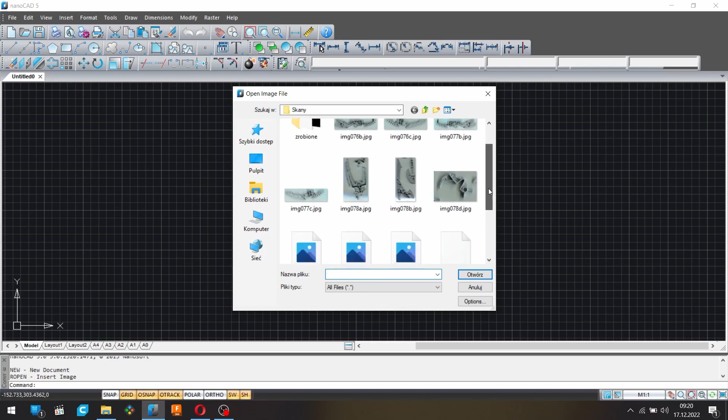Drawing 15. Okay. When I sketch on reference pictures, I like to change my line color to red, it's much better to see. Unless the part is red, of course, then you want something like bright green.

I make my reference pictures by scanning the parts flat. You could scan them in 3D, which is much more advanced and useful for bigger, more complicated parts, but for small parts like this, the flat 2D scan is perfectly fine.

But I also have the part itself in my hands, so I can rotate it, I can look how certain features look from the side, and I also have calipers that I'm going to use to take some dimensions that are hard to take from the reference itself, or dimensions that cannot be taken, like the third dimension, the width, because we have width and length, but we don't have height, so we'll have to check the height with the calipers on the real part.

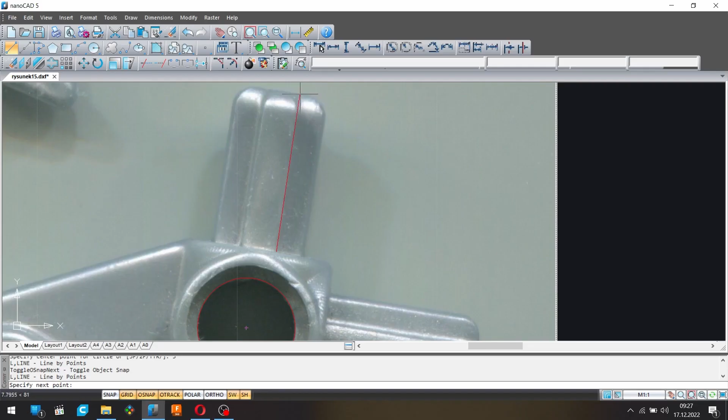Now we need to pick up the same angle that the connectors have. Again, we can use either of these lines, or even this line, but it's a lot shorter than this line, so we're going to choose one of these 4 parts. We could use this one, but because both parts are basically the same color, it will be harder to find the correct angle. So here is actually a much better place to do this, because the part with the background has much bigger contrast.

So again, we're going to zoom in, not too much, because if we zoom too much you can't see anything. And we're going to zoom just the right amount, pick the point on the line, and now we are not going to pick the other point because it's harder to again aim. We're going to go past the line and align those 2 parts so they're the same angle, and there we go.

So now this line will be our reference. Now we need to rotate this picture so this line is parallel to our grid lines. The way I like to do this, we're going to move it a little so we have space. I like to rotate the reference so the line is in the right upper quadrant. The angle here is not really important.

Now we make a horizontal line, we mirror our first line, and now if we rotate from this point, we can just grab this point, and now our first line is horizontal. We can rotate it by 90 degrees, so it's more convenient. Oh, come on, F8, there you go, and now our line is at a perfect angle.

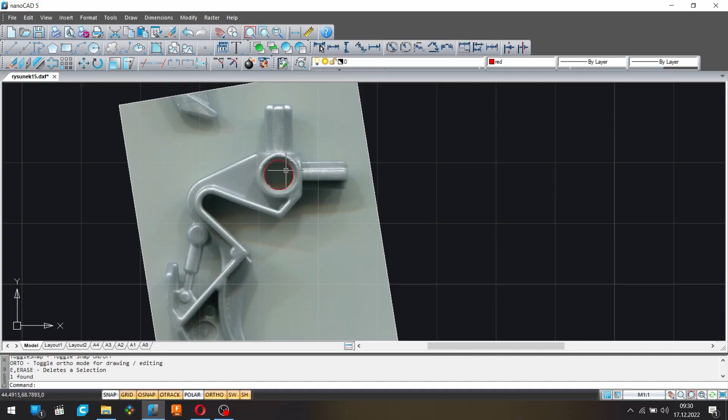There are 2 ways to do this: an easier one and a more accurate one. The easier one is to use the knowledge that the Lego connection points, whether they're Technic pinholes or big connectors, are on the grid. And the grid is 8 millimeters. The features on the grid are 8 millimeters apart.

So if we would have a part with 2 pinholes, not necessarily one next to another, but one here and one someplace else, you know that the distance between them is a multiplication of 8 millimeters. So you could find the center of those holes the same way we did for this one, measure them, count how many 8 millimeters should be between them, and scale the reference appropriately.

I find that it's not very accurate. Sometimes you could introduce error into this, especially if the pinholes are very close to one another. So actually the better way is to find the longest distance on the part that you can, draw it, see how long it is, and then measure the actual part with your calipers and use this measurement to scale the part.

It's much more accurate, and I like to do it this way.

Alright, so I'm looking at my part. Sorry, I don't have the camera on the part. You can see what I'm doing with my hands, but the stream was very last minute.

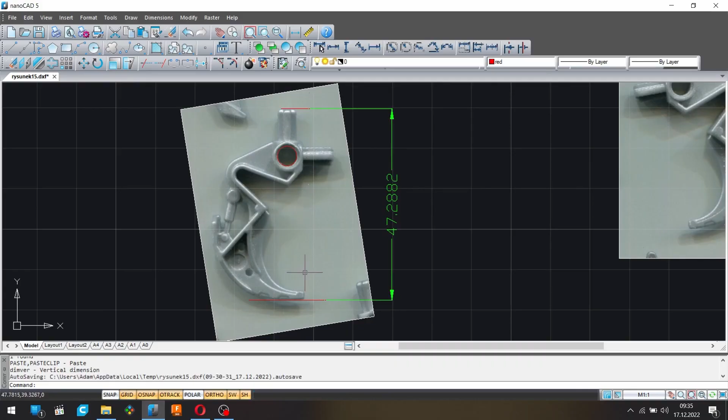And I found by doing this many times on many different reference scans that my scanner scans the parts almost perfectly, almost to one-to-one scale. But if I double check and correct it a little bit, the parts will only be better for that. So now I'm going to use my two dimensions, the physical one and this one, to scale this reference image to the perfect one-to-one scale.

So I'm going to use a calculator. I'm going to put the dimension I want first, so it's 47.04, divided by the dimension I have, 47.2882. And this is our scale factor that we need to scale it to. I'm not going to write this, I'm going to copy it.

I'm going to scale this whole group. Scale, specify scale factor — we need to change to a comma, and there we go. You can see that now the length is the perfect 47.04 that we measured from the part.

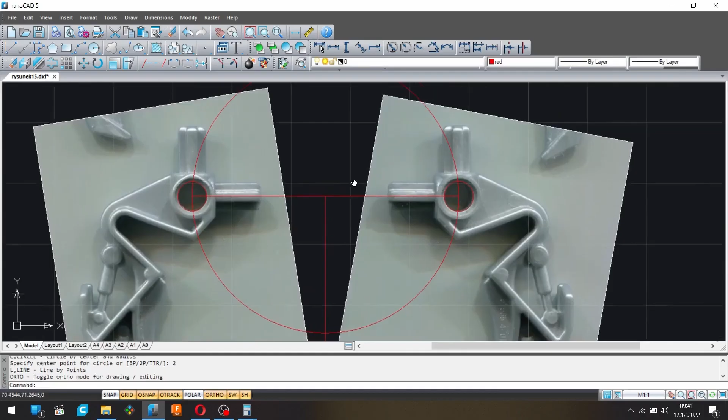Okay, we will just have to add a mirror line between them, right in the center. And we don't need anything on this reference because we'll be first working on this side, then flip it and only adjust the differences.

Okay, so now we will use our center of a circle, but we won't be using our circle because it's some weird dimension that we don't know and is probably not accurate. We're going to use our dimensions of the Lego pinhole that we know, and those are 3 circles. I'm going by diameters, so it's 4.95, dimension 6.3 diameter, and the last one is diameter 7.4.

We don't need our line, and you can see that the part is scaled very well. We can trust our dimensions of this reference, and we can now start drawing the shape of the part.

We will be using NanoCAD to draw the flat reference, and then we're going to import it to Fusion 360 and add our third dimension there. We're going to 3D model our part, and you could actually skip NanoCAD and do this whole thing in Fusion — import the reference pictures there, draw the reference there, and do everything in one program. The reason I do it this way, there are actually two reasons.

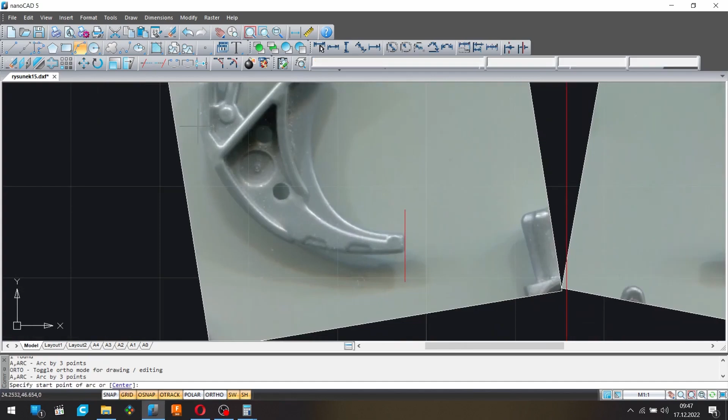So we will have to do it like this. We'll have to... almost the same length, this one is a little bit longer. It goes to this point here.

Okay, we need three points to pick up the arc, and the farther they are spread apart, the more accurate the arc will be. So we'll start here. Here's one, here's the second one.

And now again we could use the point, but you can see that the difference right in this region can get pretty big pretty fast. So rather than specifying a point, I'm going to go past the end of the arc and, looking at this region and this region, find a best way to click so the arc is as tangent as we can to the entire length. Okay, here we go.

Those lines will cross here, so we can extend it. Now we will use the center of this arc to pick up this smaller arc, because those two arcs, while having a different radius, are concentrical.

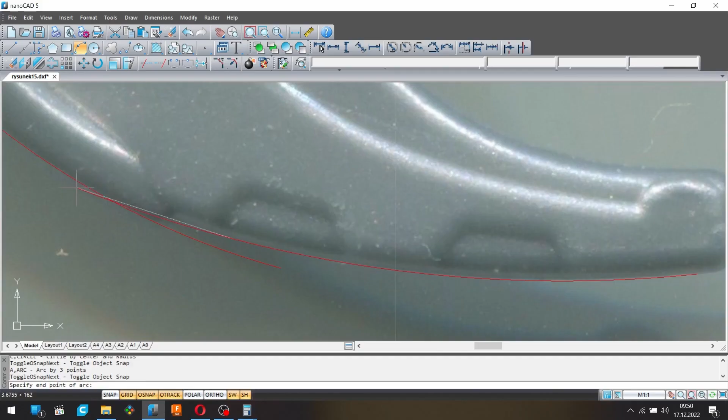We'll just draw this arc separately. There we go. How does it look? Okay, it's just a point.

We can actually pick up the center of the arc and just divide them like so. Now we can trim away all the excess. We don't need this, we don't need this. There's our nice point.

We'll come back, or maybe, no, maybe let's do them now. How to do this?

Okay, AutoCAD, which I was using before, had this nice feature where you could use offset. You could pick the line, and maybe I can't here. See? No, you can't. In AutoCAD you could use a line to offset and not put in the dimension, just visually lock it in place.

In NanoCAD you have to know the dimension first. Unfortunately, it's very inconvenient. So we're going to measure the distance between this line and this line. It's kind of a hacky way, but you have to work with the program on its own terms.

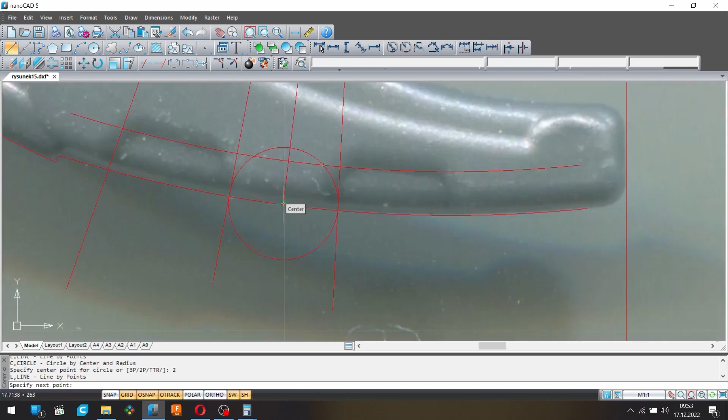There we go, there's our center line, mirror line basically. We're going to mirror this line. Now we can be certain, I can actually prove it to you.

Here we have, oh, it's not very accurate, I would have to change the accuracy, but we have around 9 degrees, and here is the same. So we now don't need this line at all. We can trim away all the excess.

Now we'll just have to round off these edges. Another feature that was very useful in AutoCAD for this, and isn't working here, or I don't know how to do this in this program, is you could draw a circle that was tangent to three lines.

So what I would do here normally with this corner, I would just draw a third line that's also tangent to this rounded corner, and then I would just use those three lines to make a perfect rounded corner that matches the reference.

You can't do this in this program. The only way is you can use two tangential lines, and for the third dimension you have to specify radius. So it's not very convenient, it's not very accurate, but the other way to do this is use a three-point circle.

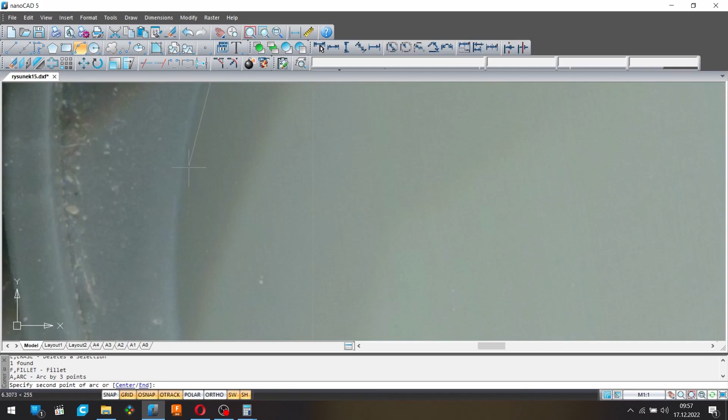I use a few arcs to approximate the same curvature. So we know that one arc starts here. There are definitely at least 2 arcs, maybe more. It will turn out as we draw, but they join somewhere here. We don't know where exactly, but we know that our first arc is still going here. Now we can see that if we made our line tangent, at some point it just drops off because here the curvature changes. We can now do the same thing from the other side. And again it drops off.

We can approximate this curvature with two arcs. Sometimes the shape is more complex, the arc might change more drastically, or there are some other geometries involved, but here we are fine with just two arcs.

But now the challenge is to make them tangential. Again, in AutoCAD it was very easy to do. I won't bore you with the details, but here we have to again do a little bit of a hack job, unfortunately.

Let's find the center. Here we go. .1. Now let's do TTR. So tangent, and our radius was 8.1, and you can see now that those two, the arc and the circle, are perfectly tangential. So again, trim off the excess, and we made this beautiful curve with two arcs that are perfectly tangential.

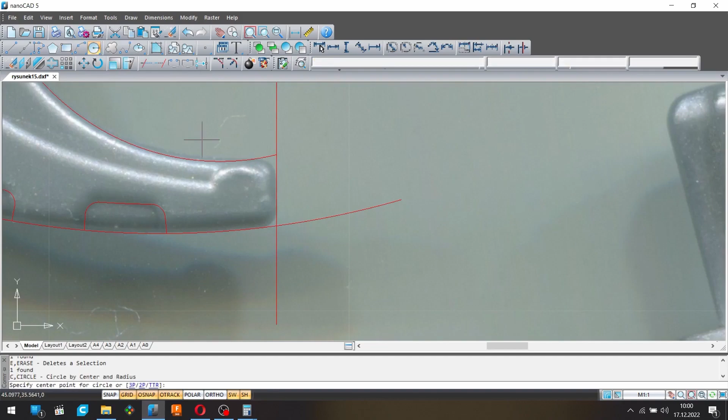We need to round off these corners. Again, we will measure them with a 3-point circle. .7. There we go.

We have another tooth here, this little step, but those two lines, the bigger one right here, and the little one right here, are parallel. So we can actually find out the angle first from the bigger one. We can now use this as a reference. There we go.

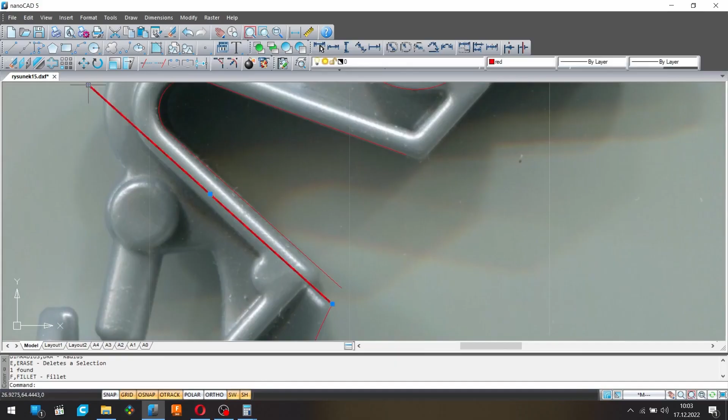1.55. I'm going to shorten this line so we don't mistake the data for this line. This is something different, so let's just leave it here for now. Okay, now we can make this corner around here.

Wait, actually, give me one more minute. Oh, there we go. I put on some music, but I have to use my headphones, so you can't hear it, and Instagram won't flag me for the copyrighted music.

Okay, now we can continue. Those lines. Oh no, I can't hear myself think with the music. I wouldn't be able to comment. So no music for me, but turn on music you like to accompany the stream. We would have music if Instagram would be a little more tolerant.

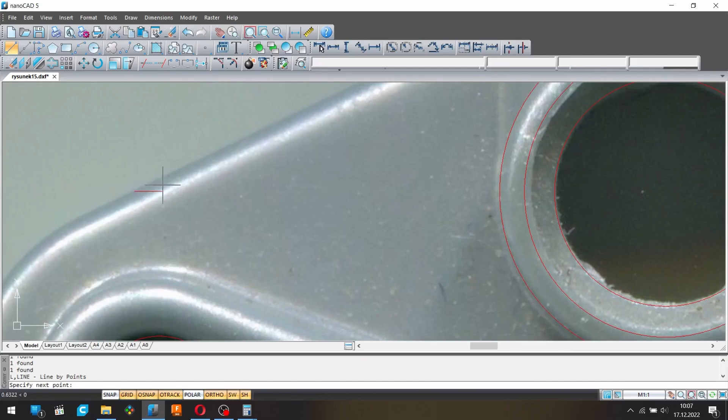Are those two circles concentrical? Yes, they are. So we can use this. Oh no, we will have a problem with this being tangent to this line. Ah, damn it.

Damn you, NanoCAD. Why don't you have so many cool options that AutoCAD has? How to do this?

I think I'll have to go the other way with it. I'll have to start with the circle and now do this line again.

Oh wait, since we have the angle, we can construct our tangencity. What's the action that comes from the word tangent?

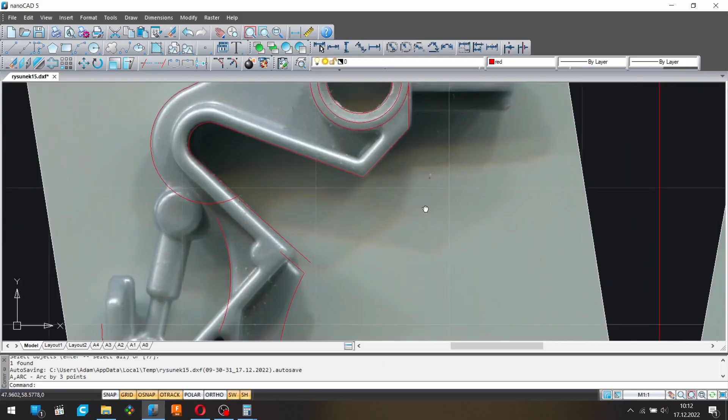So when you have a big part, try to avoid skipping certain places. It will come up eventually when you import the sketch to 3D modeling software and you have gaps. You don't have closed profiles, you can't extrude from them, and it will be clear where you skipped something and where you need to come back and redo it.

But you'd have to open the sketching software again, redo this, import the sketch again to the program. It's just a pain in the ass. So if you skip it, be sure that you remember to come back to it.

There we go. The circle seems to have its center on the crossing between those two lines, and I don't have this line yet, so I can draw it. Also, I can make up this corner because we would need another line here. So I was trying to... oh, I'm making so many skips.

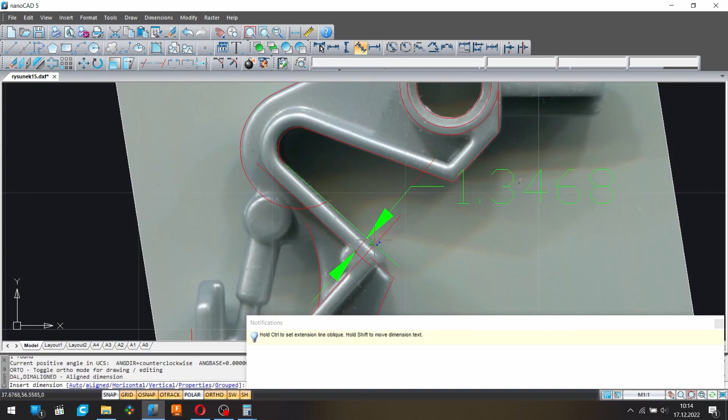1.35 is the dimension. We use the offset command. 1.35, and now we can go crazy with the offsetting. This offsets to here, this to here, this to here, this to here, this to here, this to here. Yeah, it's the same offset, so we can do this now also.

I think that's everything. Now let's patch all the connections. Don't need this, don't need this. This. Now we have our nice corner. We'll come back to round it off in a minute.

Everything's okay here. Trim this. We'll round this off in a minute. Okay, seems everything is fine. Now we can do this circle. Go.

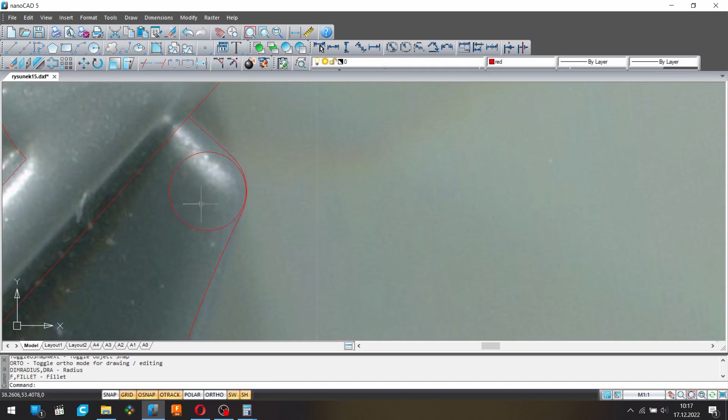Let's say about here. 0.56. How was it here? 0.7. Will 0.7 work here to keep it consistent? Let's see how 0.7 looks. Yeah, kind of. Looks okay, we can use 0.7.

Okay. Going on the same path. Here we go. Here we go.

There, maybe we'll have to see in the 3D phase if it's even possible. I won't be rounding off the internal corners, I'll just leave them as they are here. The only one we have to absolutely do is this one, so the lines connect.

Again, I was trying to do the AutoCAD thing, draw a third line and define the circle with 3 tangential lines. You can do this. Let's measure this corner with 3 points.

About here. 0.3. Let's cut this off here.

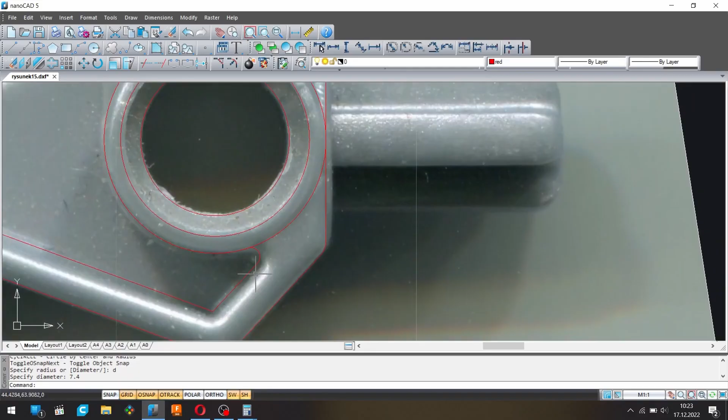This corner is fine. Everything is fine. I'll try to remember that from this line up everything is already finished, so I won't be going back there to even check.

Okay, maybe let's tackle this piston now. Pistons are very fun to make on the Bionicle parts, as long as you have prepared a certain approach to them. I like to do it in this way.

First, I pick up the two hinges. This one. This one. And the line between the two centers. Come on. Here we go. Center is our axis of both of those two cylinders, and we also picked up the angle.

Of the sides, so we can use this line to pick up the diameter of both cylinders, the bigger one and the smaller one. There we go. But you might suspect that the distance from this line to the center and this line to the center probably isn't the same, and you can actually even see it that this dimension is much more bigger than this one.

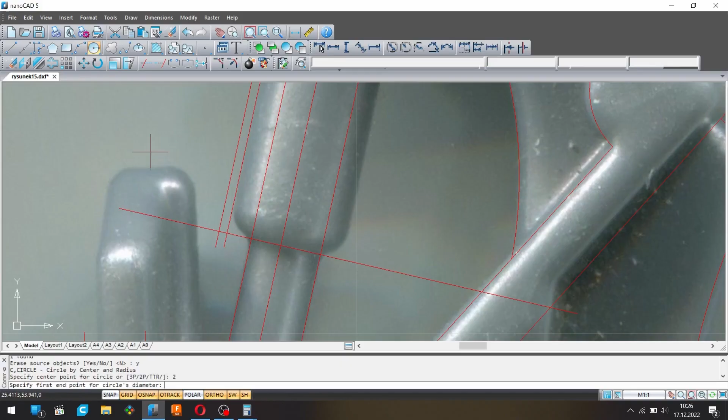The one from this side disappeared. It's this one here. Now you can see that there's a difference between them. So if we moved this line to this line, then we would have the same gap on this side. So to kind of make both of the sides happy, we'll find a line that's between them.

Let's use this one. We don't need this. And now the line is not as accurate to this side, but if we mirror it back to the right side, you can see that the gap we have here, we also have here. So both lines are the same distance from the best lines they could be.

And now we can revolve it and do a cylinder out of this profile, and it will be the closest we can pick up to the original size. So now we'll do the same thing with the smaller diameter. Again, let's do it a little quicker.

There we go. Now we can get rid of this excess. Just move this here to be sure that we don't leave some random lines and geometry on the line there. Okay, let's extend this.

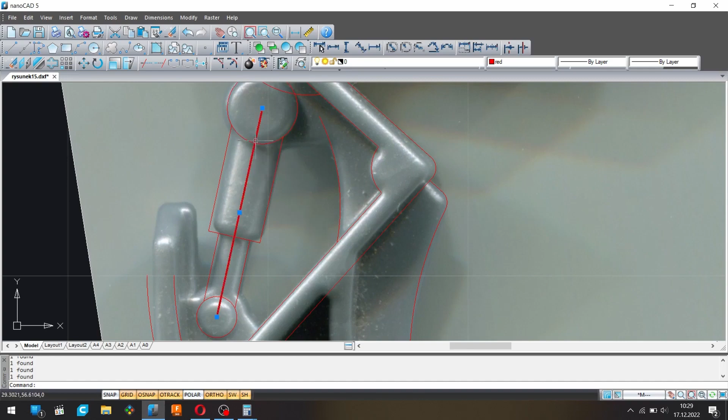I like to leave the center line because we will actually need it in the 3D phase to revolve half of this profile to make a cylinder out of it. So I'm not going to get rid of that. I'm going to extend it so we can use it later.

This is actually unusual. On other Bionicle parts we would be done, but this one has this fillet right here. Not sure why, but let's model it how it is, because we are making a recreation. We are not allowed to make decisions about the way this part looks. It might be stupid, but we're doing it the same way someone did it before.

Okay, that was a little harsh. It's not stupid, I would just do it a different way. Not sure what the reason was here, but it's not stupid. There might actually be a very good reason and I just don't know it. Let's trim the excess.

Mirror that. Get rid of the excess. There we go, that looks pretty great.

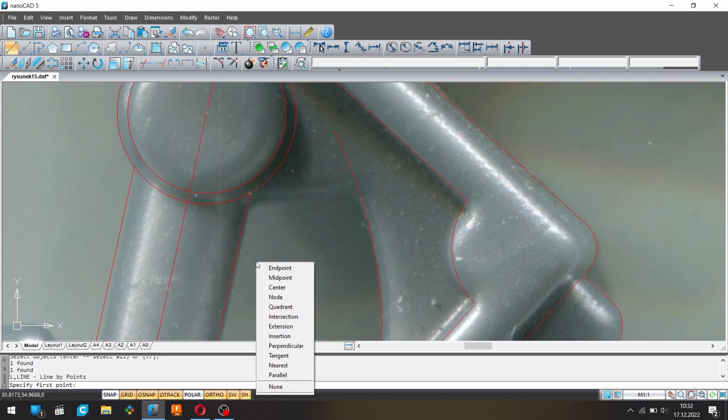I hate to be a broken record, but in AutoCAD you would do Control Shift right, choose tangent, pick up the circle, and you could have a perfectly tangent line to the circle, but I have no idea why it doesn't work in this NanoCAD. Maybe it's available in the paid version. I'm using the free version, but I have no idea why the menu is here, but if you use it, nothing happens, not even a command shows up here. No idea.

So let's do the same trick we did earlier. Let's pick up the angle, make a line that's perpendicular, move this to the circle, there we go. Now this will intersect here. Don't need this. There we go. Trim off the excess.

How does it work here? Maybe like that. This is the same thing we had with those cylinders intersecting here. It will actually turn one way or another in the 3D modeling phase, so I'm not really concerned how this corner looks, because when I extrude this plane and revolve this cylinder, they will meet one way or the other, so it doesn't really matter to me.

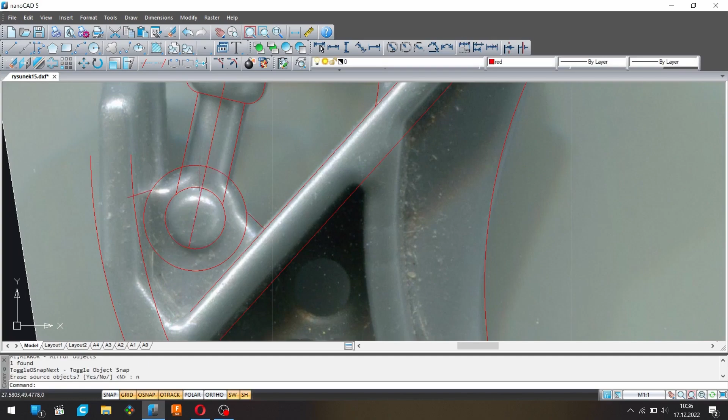And actually this looks to be mirrored from the rotation axis of the cylinder. Let's try if this will work. Kind of, oh, not really. It's perpendicular to this line that we don't have here.

Let's get rid of that for now. How to do this? Okay, let's do this corner. Wait. The arc here comes in contact with a straight line, but I look at the part, and they don't seem to be tangential. So this is actually more convenient for us. This little face seems to be vertical, so we can just use a vertical line. There we go.

They intersect, we have this little sharp corner here, not tangent. And this kind of angle here, this deviation from the line, is actually a distortion caused by the difference in thickness from here to here, and the part actually doesn't slope off like that. It's all one face, I'm looking at the physical part, and that's how I know.

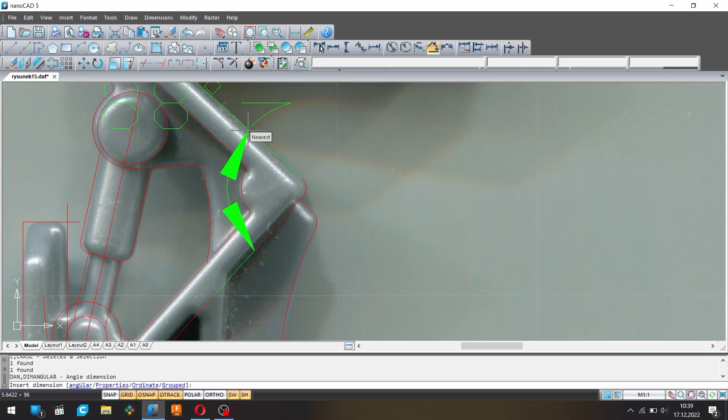Let's assume this, and we can actually add those two lines, supposed to be perpendicular. Not really, it just looks like that. If we actually make 90 degrees here, it will not be very accurate, it would cause error. But also, wait a minute, those two lines, they should be...

Oh man, I missed this, I'll have to redo this in a second. But let's finish this first. What was the offset? God damn it.

1.3, maybe 1.35, yeah I think it was 1.35. Offset 1.35, we could have checked in our command history. God damn it, what a waste of time. This is basically what we needed to do. God damn it.

That's how you pay for crappy memory. And the edge here was what exactly? 0.7, I thought 0.3, but the 0.3 was from the inside. 0.7. Here to here, here to here. There we go.

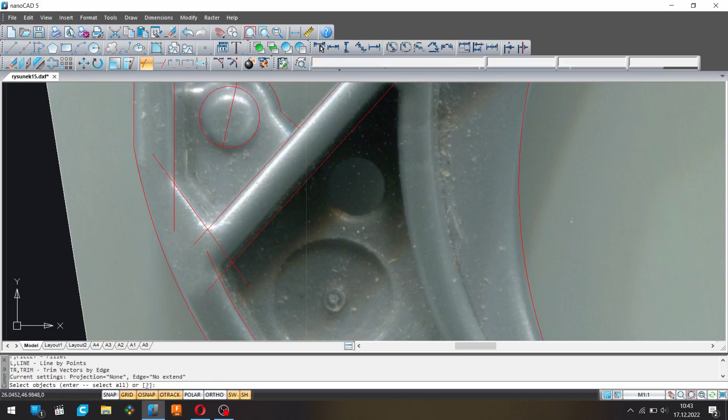I can show you how the extend works. The trim works like it deletes the rest of the line to the next point where it crosses with something. So the cutoff works like this, and the extend, it's easy to imagine, works exactly the opposite way. It extends to the next feature.

So basically we can do this, or we can extend it past the point and trim. It doesn't really matter, works the same way. Okay, so now let's round off the corners.

0.3. This one definitely yes. This one, let's leave it. Let's leave it like it is. This one yes.

Okay, that looks nice. What's the connection here? I think it will turn out in 3D. Let's just do something like that to close off that loop, this profile.

I'm not sure it will look like that. The third dimension will dictate the actual shape. Okay, is this all done? I think so. Let me look at the part.

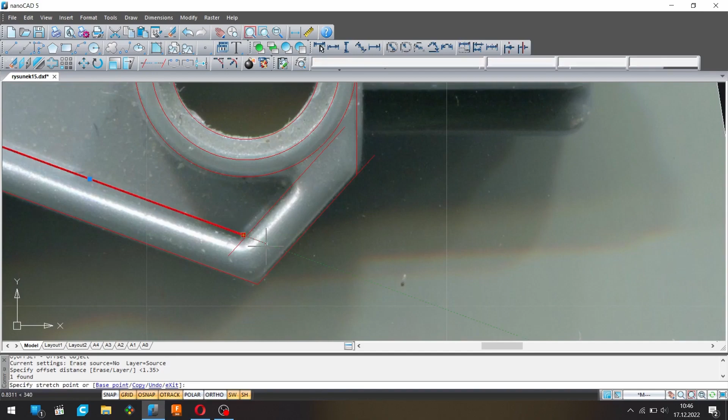And the offset was 1.35. This to here. Okay, and the inside radius was 0.3. Oh, it didn't cut off.

Worked fine. Maybe no, should cut off the rest. Yeah, that's what I was talking about earlier. The fillet command sometimes has some problems. I'm not sure what they are caused by and how to get around them. I don't know how to work with it sometimes.

Okay, that wasn't so bad. Nice. So this little section is everything that's left. Let's pick up these 3 circles.

This one will dictate our diameter and our center of the circle, but this one will only dictate the center, and to have uniform... well, actually, let's redo this one too.

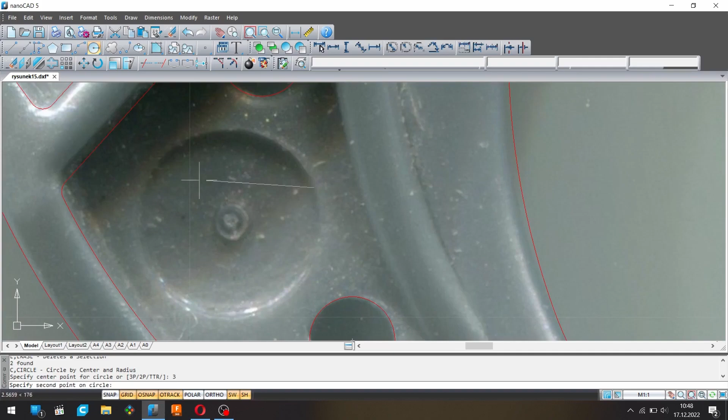The actual possibility is that the guy who first designed this didn't make those holes either 1.89 or 1.9, but like 2 millimeters. Now I'm picking it up with an error after the ABS shrunk in the mold. It's not extremely accurate. I'm not redoing the exact thing that the Lego designer did so many years ago, but you know, it's reverse engineering. You have to expect this kind of inaccuracy and just work with it.

For features that need much better precision, like connection points, pinholes, axles, you would have to work out the perfect dimension the other way. You could measure it with calipers, 3D print it and prototype it, and check the fit with other parts. You would have to be much more precise here, but when we just pick up the outside curves of some blade or some holes that aren't even connection holes, it doesn't really matter if they are 1.89 or 1.9, it doesn't make a difference.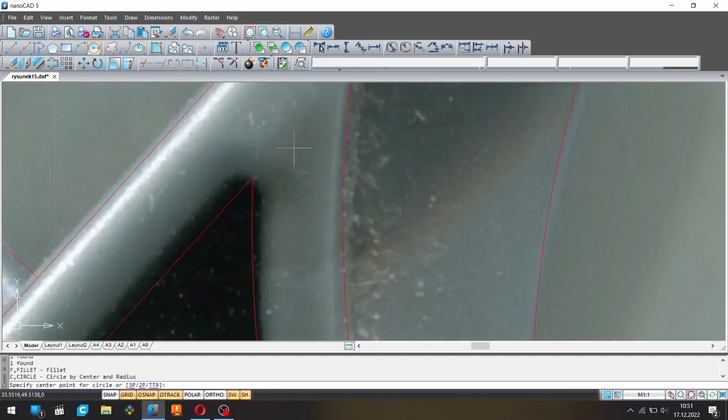It doesn't look like 0.3. Yeah, something's wrong here. But this might be 0.3. Yes, this one is. But this one, I also have the error here. As you can see, there's a gap. Let's measure the radius here. .35. So actually 0.3 should work.

How does the 0.3 look again? Let's leave it. Doesn't really matter. The center of the circle. Here we go. Down here.

Again, just to close off the loop, the profile. Okay. Let's see, we have this line here. And are they related in any way? No, doesn't look like it.

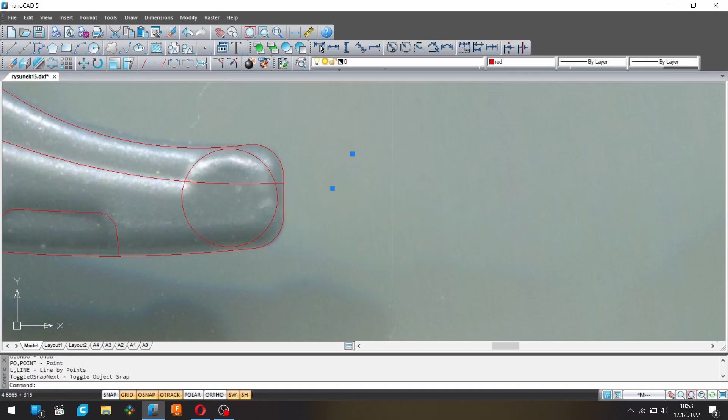What's this, is it point? Point, what does a point do? Oh, you can pick it. No, you can... what? Never mind, how to do this?

It doesn't really need to be tangent to this one or this one, but it absolutely has to be tangent with this one. Oh, I know how to do this. It will be another hack job, but I've lost count of the hack jobs we did today, so it doesn't really make a difference anymore. There we go. Good enough.

Let's check that we didn't miss anything. Everything looks fine here. Everything looks fine. Alright, so we have... I didn't save for this entire time, god damn it. Thank god that it didn't crash, we would lose all this work.

Okay, this side is done, now we can mirror it to the other side. Let's just recheck, everything here looks the same.

I will not be modeling the artifacts left after the injection molding, especially since they can differ through different parts. Not only could you have different molds and the artifacts would be in different places, even from the same mold the artifacts could sometimes show and other times not. They could be once above the surface, then below the surface, so it's really a waste of time to model all those molding artifacts, because you will always get them wrong no matter what you do, so it's best just to skip them entirely.

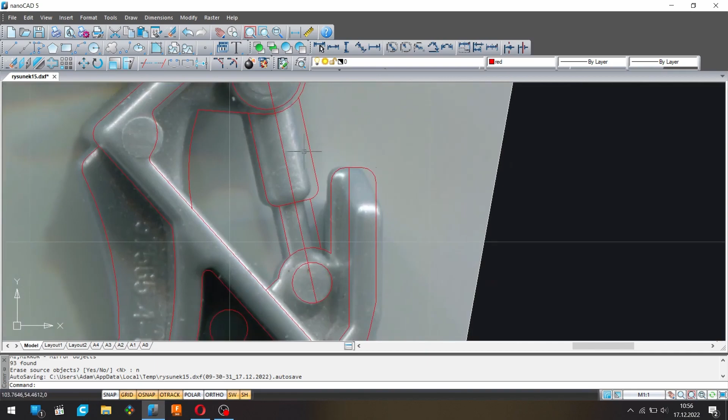Let's not care about this one, everything looks okay here. I will not be modeling the copyright logo or the part number. I don't need it for anything, so the only difference is this diameter.

Okay, don't need this. Trim here, here, here, here. This looks fine. Okay, so we are done.

Now we can import those flat references to Fusion and do our third dimension, and 3D model the part.

Okay, so now with the sketch in NanoCAD done, we redo from references both sides of the piece, we can now import those lines to a 3D modeling program. I'm using Fusion 360, and we can use the sketch we made to 3D model the part with some volume to it.

So first we're going to start by inserting the sketch we already did. I didn't use the plane. Okay, here we go. Now everything is okay. There we go.

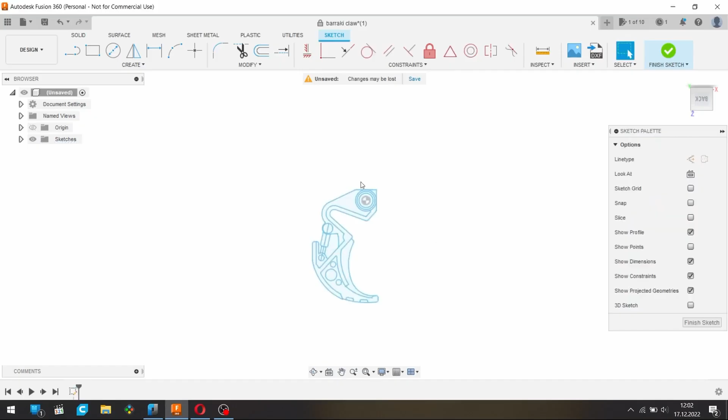Oh man, I hit escape again. Point to point. Okay, and now this half of our part is in the correct place. We can finish our sketch. I'm going to rename it to more easily find it later. I'm going to name it front.

Now we need the other half. So again, the DXF, select, okay. Now we need the... wait, let me see. Okay, we need this one. So we can delete this one.

We need to mirror the line. Okay. And we can move it so they are in the same place, point to point. Okay, now you can see we have both sketches in the same place.

This is the identifying feature, the circle that's on one side smaller, on the other side bigger. So we can see both sketches because they are transparent. We can save.

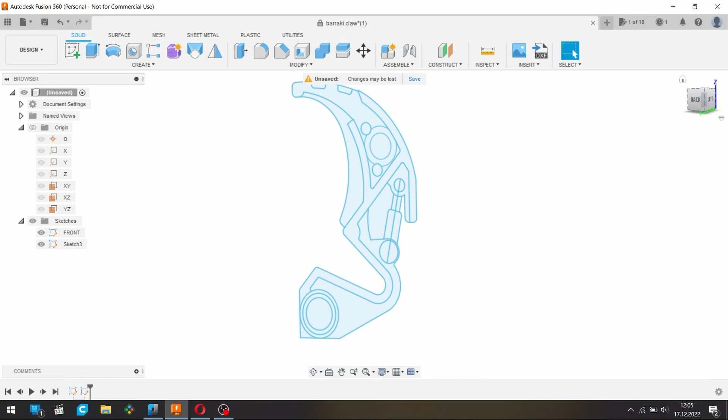This feature here that's going to be extruded from this arc is tapered down. So this entire profile is at the set height, but this little appendage goes down to this plane. The best way is to do this appendage first, because if I start with this plane and then cut off the slope of this part or model it in some other way, I'm going to have to watch out for the planes we already made, to not cut them or modify them.

So my general approach to this kind of thing is to do the most complex, most difficult geometry first, and then you can slowly add the easier stuff. So I'm going to start with this appendage, and first let me look at it. What operation would I like to use?

If this appendage was straight, if it wasn't on an arc, it would be very easy, because I could extrude this profile to the desired height, and then tilt this face down. The problem is that it's at an angle, so if I do this, it won't work the way I want it to.

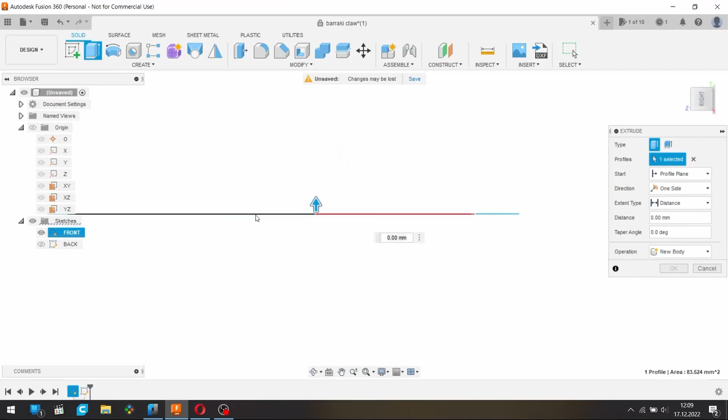I like to position the plane that I'm extruding from in the middle of the part. You could position it on one side and work from one side to the other, but the problem is that there are many features in the middle. If you did it that way, you would always have to go from one side to the other, and then move the feature you started so it's symmetrical on both sides.

The better way to do this is to work from inside out. So you know that the features you make are always in the middle and always symmetrical. Also, the dimension we need from here to here is much easier to check with calipers than the dimension you would need from the center to the edge. So that's just a natural way to do this.

I'm going to use my calipers now to check what size, what width this part is, and it says 7.38, so it's probably 7.5. We can round it off, and now we have some starting geometry.

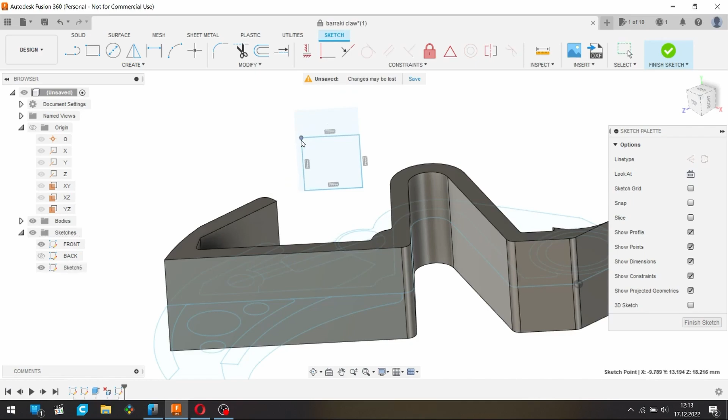Like I mentioned earlier, there are situations where you might actually want this, but if you have a picture and you want to draw on the picture to recreate the shape, then this situation is very annoying to deal with.

So to lock this in place, I would have to put a dimension here, I would have to put 2 dimensions here, and you can see that the rectangle now can't change shape, but it can still move. So now I have to, for example, put a dimension here. Now it can move only up and down. I have to put a dimension here. And now after 4 dimensions, it's finally locked in place and I can't move it. So it's a really big problem and a pain in the ass to work with. So when I create a sketch I'm going to model from, I like to do it in drawing software, so it's much more convenient.

Okay, now we can get back to the job at hand. I have my rectangle. I know it from the physical part. I can see how the shape looks. I can see that the sides of this appendage will be flush with the sides of this extrusion I already made. You can see that I can't move the rectangle up and down, but now I can move it side to side.

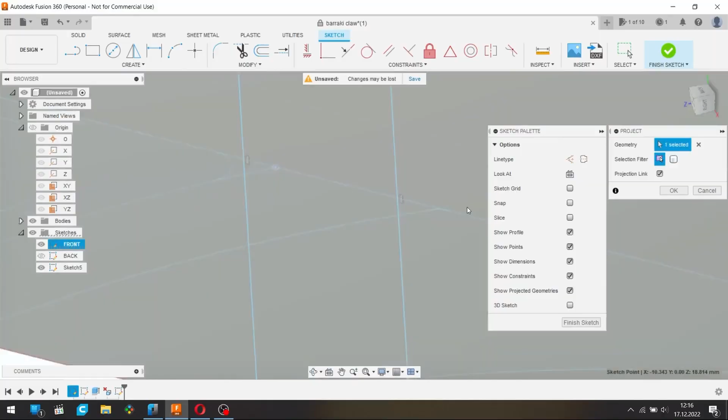So we finish the sketch, we get back to our sketch. And now, if I hide the earlier sketch, you can see that we don't actually have anything that we can use. We have only this one sketch, this one rectangle. So to use the geometry from the previous sketch, we're going to make it visible, and we're going to use the command project. We want this point from this earlier sketch and this point from this earlier sketch to appear in our newer sketch. Now you can see that even if I hide the previous sketch, the points are still here.

And now we can say that this line is going to be on this point and this line is going to be on this point. With the sketch turning black, it means that everything is constrained. I can't move it, I can't rotate it. It's basically as you want it to be. In general, you want to constrain all your sketches, so you can't accidentally move something by accident.

But again, there are instances where it's more beneficial to leave the geometry unconstrained, especially if you are fine-tuning something and you want to see how the geometry will look with this sketch, and then you want to change it a little and see the difference. So you always want to choose the best way to constrain your sketches for the task at hand.

This is one end of this appendage, and now we need another end right here. So we are going to finish the sketch, this rectangle we drew. We are going to leave it for now, and we need to do something similar here on this line. We could create an extrusion from this profile and create a similar wall to this, but it's not really necessary, and like I said before, this might cause problems later.

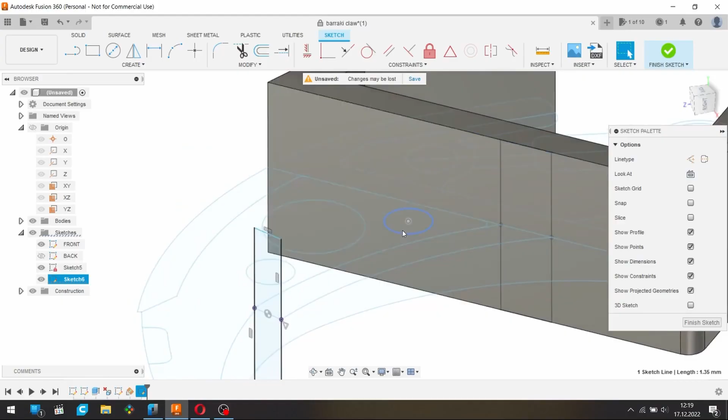It's not necessary, you can do this in other ways. For example, you could add a dimension to this rectangle, and say that the distance from this side to the center, well, let's delete this constraint, and now I can set the top side to the center equals this, whatever it is. I can change this, and it will update, divided by 2. So if I change it to 8, you can see this changed to 4.

So it's always in the middle. You can enter more complex equations here. I could add 1, I could divide it by some other dimension. So it's really helpful, you don't have to do the math yourself. You can just say that this thing has to be, for example, 7 times bigger than this thing, or this thing has to have a relation to the other thing as this to this. It's really helpful, not really needed here, so we can do just the midpoint.

Okay, so now I'm going to look at the part, and I see that this side of this appendage needs to be flush with this profile. I don't have this profile yet, but I can already measure what it will be, and it will be 1.41. So we are going to put 1.4, and we know that this sketch, this plane, when we eventually make it, will be the same width as this appendage.

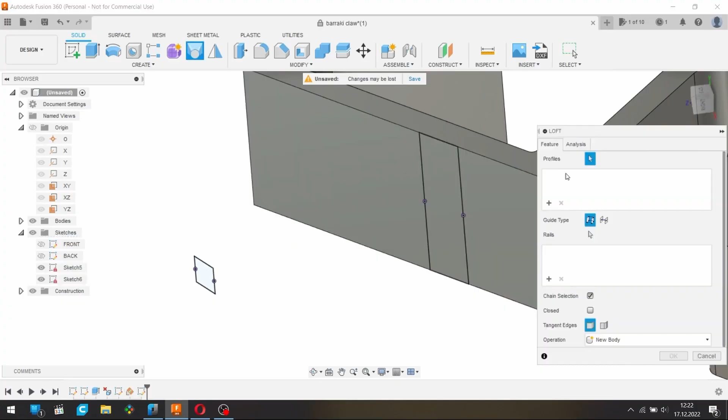Now we could use the command loft, but it's not going to have the shape we want. I'm actually going to use it and show you what it will look like. We want to choose our profiles, which we already have. So we add the plus, we want this profile, we want also this profile, and you can see there is a shape that appeared between those two profiles we made.

But if we go to the... let me just set this up, wait a minute, I'm going to set this at home, fit to view. Okay, now we can see that the end of this feature and the beginning of this feature are in the correct place, but the shape of this feature isn't as we want it to be.

We want it to go at those arcs, but it goes straight. We could add another profile here in the middle, and it would be a little closer to the arc, because it would go from this one end to the middle and then to the end, but it still wouldn't work the way we want. It wouldn't go at those arcs.

So to fix this, in the loft command, we can add something called rails. So the entire command would say: start at this profile 1, and at profile 2 right here, but don't go straight from 1 to the second—also use the tracks, the shape of the path that we want to go from one place to the other. So we are going to add those rails, and then the shape will have the desired result.

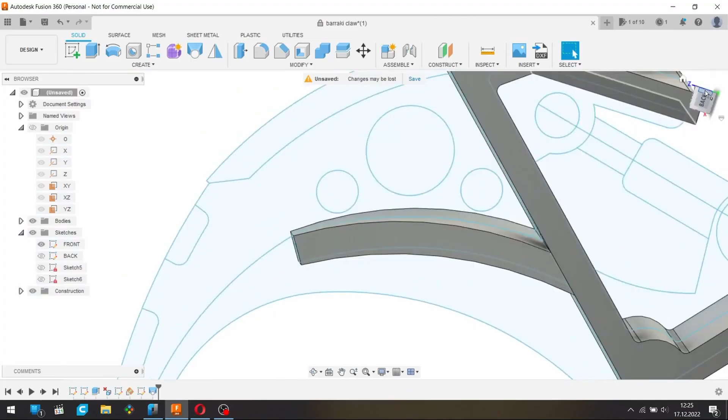So how to do this? One way is to add those rails here in the middle. Actually, I'm curious how it will look, if it will even generate. Here to here. Add those rails, one here, one here. Let's see how it looks. Well, it's actually not bad.

What I wanted to do is make 4 rails for each of the corners—one here, one here, one here, and one at the 4th corner. But because the shape is pretty uniform and the transition isn't very complicated, I don't think we actually need to do this. I think we can leave this as is. So we actually managed to make a little skip and save ourselves some trouble, so we can move along with the part. This worked out the way we wanted it.

And now basically the same story is with this appendage. This appendage is a little different because it meets this plane, which we still don't have yet, at a different angle. So we will have to take that into account and remember that it actually goes to here—it doesn't just finish here, but basically it's the same story. So instead of commenting, I'm going to go quickly through it, because you already know what the problem here is and how I'm going to solve it.

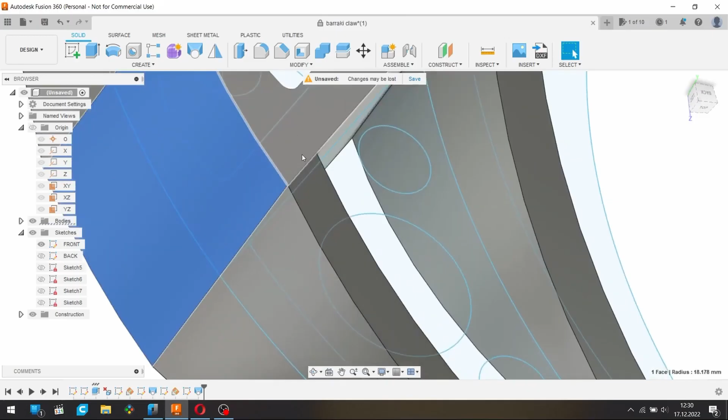Okay, looks good. Now you can see, if you remember how I do it, this entire arc is one arc, so it would be nice if this face would also be basically the same, that we wouldn't have two faces. To fix this thing that happened here, we can choose this face and delete it, and the program will use the faces around it to generate a filling face. So it deletes this one face that was here and fills the hole that is left, using the other faces around it and figuring out how this face should look.

So this works very nicely. We have the shape we wanted. We have one smooth face here. We can continue. I'll export. Let me look at the part, what we have next.

We can do the piston next. We could actually already do the easy parts, but since we are doing a little bit more complex things, we can use the piston because it's not really difficult, but it's a fun process, so it will be fun to see.

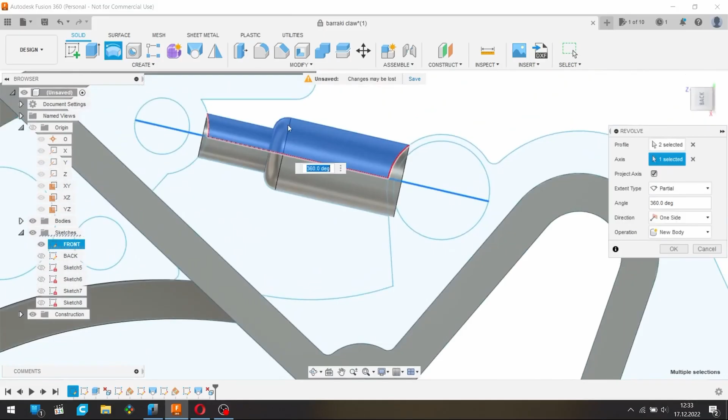So we want to revolve this profile around this axis, and you can see that we have a nice cylinder that also lines up perfectly to both sides because of the splitting difference we did back when we were drawing. You can also see that there is a concave shape right here because of the way the piston meets with the other geometry on our sketch. We could leave it like that and then try to patch it, but it might be difficult if it gets covered with other bodies, so the best way is to deal with it now.

And we can do it by squaring off this end and also squaring off this end. Now we can edit our feature and add that we want this revolved too. And you can see that the concave - convex, I still don't know - the hole that was here disappeared. So we can do this to this side too, and it will be easier to merge with the other geometry later.

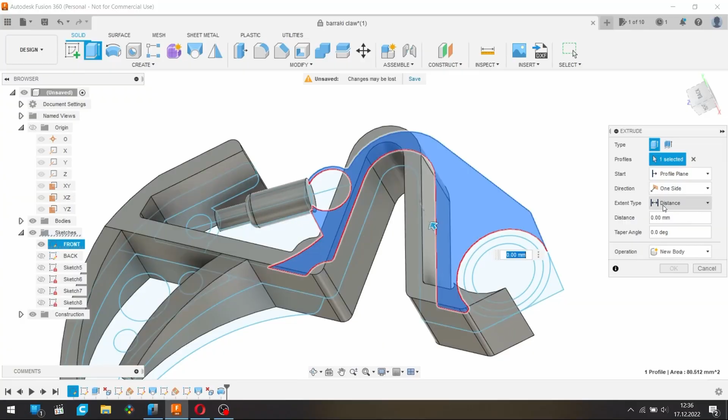Okay, so now we can maybe extrude this profile. Like I said, there is no real order to it, you just kind of figure it out as you go, which feature you can do next. Sometimes you make mistakes and have to go back, because you generate a new geometry that screws with the previous geometry. You have to try to get around a few things, so it definitely happens, but if you put a little thought into the way you approach it, you can save yourself a lot of headache. So again, we are going to extrude it symmetric to both sides.

And the distance we want to extrude it to is taken from the part. I'm measuring 1.29, so it's probably 1.3.

Oh, I remembered, we forgot to add those splines back - splines, I mean fillets. It's not necessary to do them now, they would be very easy to add later also, but if we add them now, we won't have to worry about them anymore. I'm going to measure what radius we had here, 0.3. This one is also 0.3, so we can do them both in one operation. We want to fillet this edge, we want to fillet this edge, and we can type our radius, 0.3.

And if we look from the top, so it lines up with our sketch, you can see that we recreated perfectly the geometry that we kind of disabled earlier. Oh, was it? Yeah, here also - is it 0.3? Yes. So we can edit our fillets, and we want to add this one too.

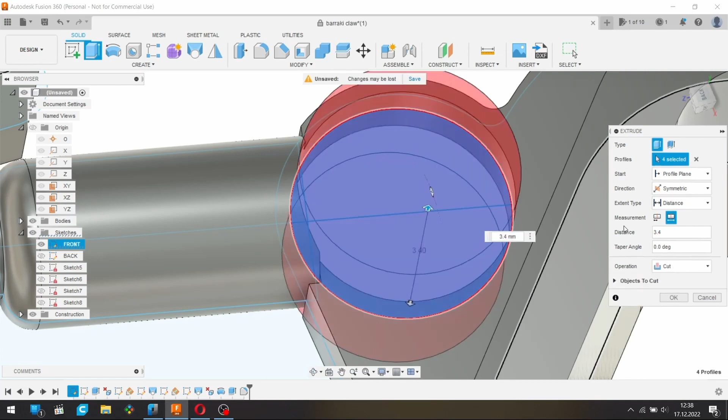Because we added some geometry with the revolve, you can see that's not supposed to be there. When I tell the program to intersect with the geometry, it assumes I want to cut away this geometry, because it doesn't know how the final shape should look, so it assumes that because we cross one geometry with the other, we want them to cut each other. But that's not true - we want them to join, to add on top of that.

3.4 again. Okay, you can see that it filled up nicely. It looks a little big though - let me check that. 3.4, well, that's how it's supposed to be. Looks weird, but what are you gonna do.

I'm going to disappear our sketch, and you can see that from this side everything generated very nicely, but from this side we have some problems - there are some gaps here and here. We don't want them.

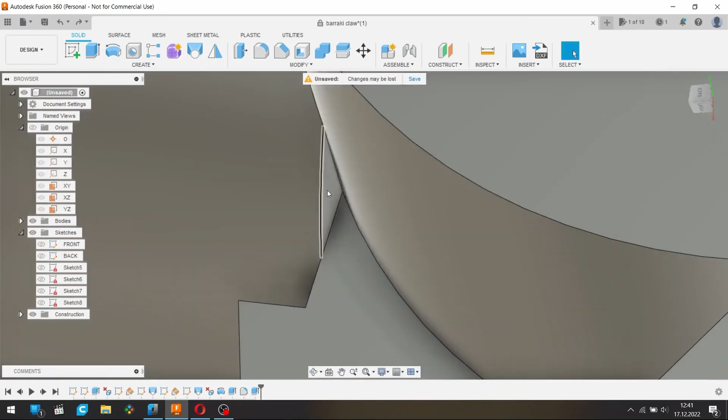So when this happens, you have to add some other geometry to let the program know what you want. So you could point to this face, but also this face, and the result might be different - it might not be, but it might be. You could actually cut away something. There are ways to get around that, but with something as easy as this, everything works great - you don't need to add any more work to it.

Same here, you can see that filled up really nice, and also here. Go away. Perfect - here, go away, and this side looks now really good. You can do the other side the same way.

And it looks really well, so we can move on to the next thing. Let me see. Okay, so...

Now I need to extend this profile, but I suspect it's the same width as this profile, so I'm going to actually check this extrusion - not this one, I think. Ready? Yes, it was extruded to 1.3 millimeters. I'm going to measure my part - actually, I'm not going to measure.

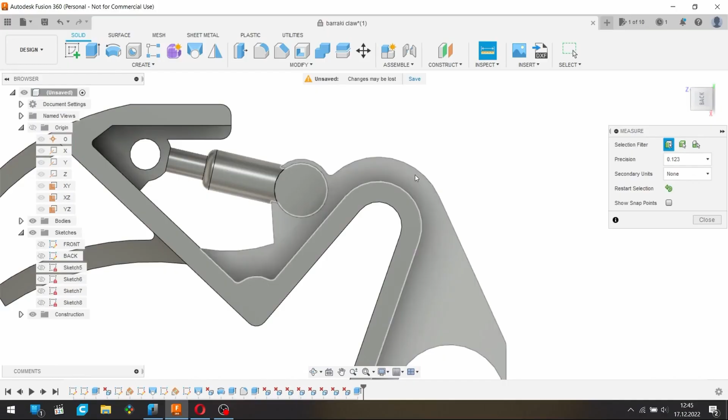We have 1.6 here and 1.3 here, so it's a pretty big difference. There's a small chance that I measured it so badly that we have this much difference, but probably this region is thicker to allow the flow of plastic inside the mold. So it's actually good that we did it in a different operation.

Now we can recreate the other pivot. We can again say go to this wall, but stop 2.45 millimeters before it, and do the same thing for the other side. We can actually check - 2.45, the other side 2.45. This is the benefit I was talking about of working from the middle to both sides.

If we would go to one side and then try to basically - let me show you. If we were going from one side, we would have all the features here flat, we would extrude them to the other side, and afterwards we would have to move the sides to the appropriate place, and we would risk making a mistake where the distance from here to here is actually different from here to here. We don't have to even think about that, because we are working from the middle to both sides the same way, so we know everything is perfectly symmetrical.

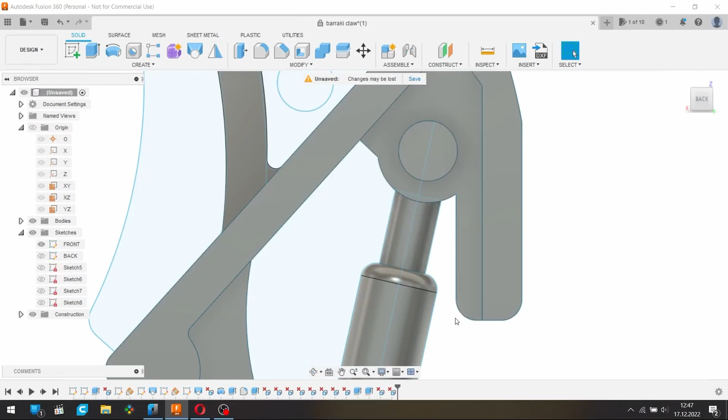Let's clean this up. Perfect. We can enable our sketch and check if everything lines up with our sketch properly. Everything looks great, there are no mistakes. Looks really nice. Let's save our progress.

With CAD programs, there's always this kind of modeling tree which shows every operation you've done so far. So we can go to the very beginning, and I can go one by one operation, and you can see all the things we did. This is very handy for the thing I did in this modeling process already a few times, if you want to go back to some feature and update it with the knowledge that you have now.

For example, I could extrude something else, and see that those things don't line up. So I can go back to the first thing and edit the extrusion length so they line up perfectly. And it's really nice that you can go back. With this, there's no reason to not save your progress as much as possible, because even if you make a mistake and save it, you can always go back and edit, redo, modify the things you already did.

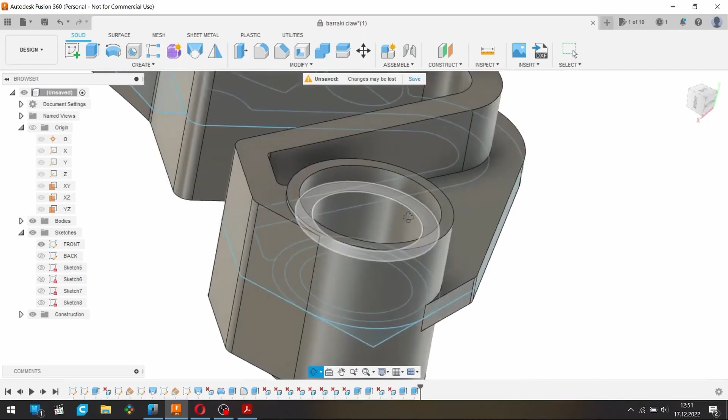Okay, the third hole, the third circle is a hole, so we don't extrude anything. So that's done. And now we need to do the cylinders we know are here. So let me just see.

Are those two faces parallel? No, inspect this to this. Yes, 90 degrees. I want to check with this origin, is it also 90 degrees? Okay, so we don't have to create new construction planes from the origin. We can use the walls that we have here and sketch on them. If this wall would be at a different angle, we could risk introducing an error, but because they are perfectly at the place we want them to be, we can use them.

So let's start a sketch right here. We want... oh wait, I messed up. Although...

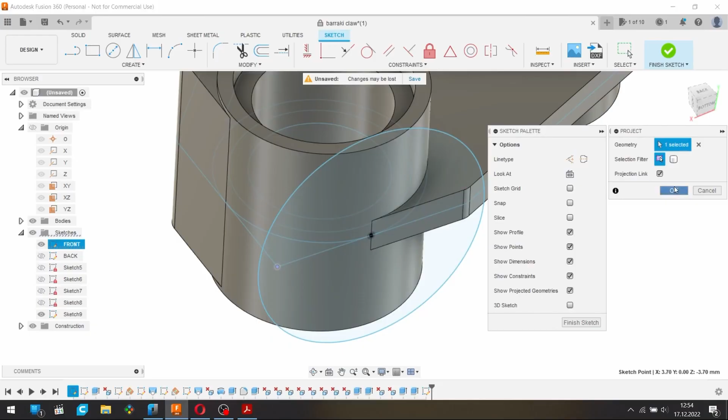The thing I'm thinking about right now is there are many ways to generate the same shape in CAD programs, but two of the most basic ways to generate a cylinder is to revolve it, as we did with the piston, but you can also extrude it like we did with the pinhole and with all the profiles. If you create a profile that's just a circle and extrude it, it's also a cylinder. So I thought I was going to revolve it, but I had a brain fart again, and the way I set up this sketch, it's set up not for a revolve, but for extrusion. But that works just as well for us, because I showed you the revolve function with the piston already. There's no need to do it again, you can do it a quicker way. This to here, we have a sketch, and we can do extrusion.

Again, the program thinks we want to cut. We don't want to cut, we want to join. There is an option, let me see if it will work. The same thing we did here. So we can go to this pinhole, and you can see that the inside of the pinhole stays clean. This is one way to do this, but again, there are many ways to do the same thing in CAD.

The other way, maybe quicker, maybe not, is to extrude past this pinhole we want, and use our function that I showed you already. Delete this face, and also this face. Delete, and it's the same result. So whatever works for you, you can use it. Some instances one thing may work and the other may not. So yeah, many ways to reach the same destination.

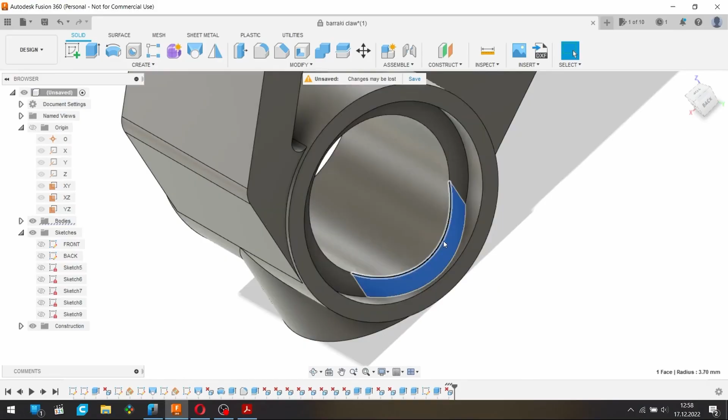The hole of the pinhole is cleared out, but the cylinder is left on this step, and this is obviously not what we want. So we can go back and modify our input and say no, I don't want this face, but I also don't want this face, and I also don't want this face. Now click delete, and now the program knows what we are talking about and knows to delete all of that. So it's actually a good way to demonstrate the thing I was talking about earlier.

Okay, so one cylinder is done. Let me export, save our progress. Okay, now we want another similar cylinder on this side, so let's do the whole thing again.

What's the diameter here? 7.4. Wait, shouldn't it be 7.85? No, the length from this to this is 7.85, and the dimension side from side is 7.4 because this pinhole diameter is also 7.4. So everything checks out. Dimension 7.4. Okay, let's extrude everything here.

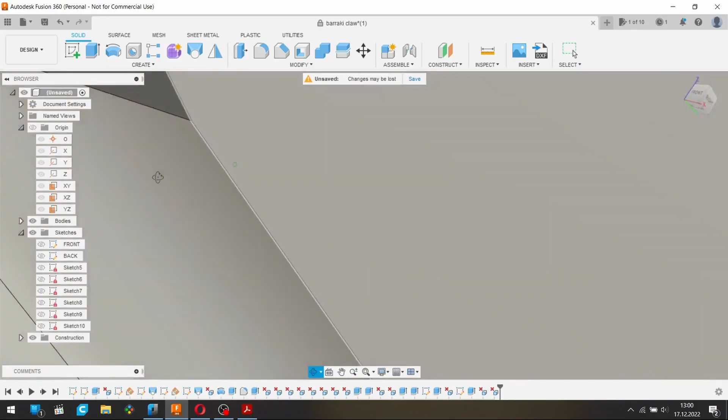Everything looks great here. And here is the connection line between those two cylinders that I didn't bother to draw. If I turn on the sketch, you can see that there is no actually. Here is the connection that I didn't bother to draw, because not only was it not necessary to create those shapes, it also might not have lined up even if we would draw it. So it turned up by itself either way.

Some weird geometry here, let's delete it. This side is clean, this side. Okay, looks great. So let's just check one last time this region of the part. Everything here looks great, this looks okay. So from this line down, everything is finished.

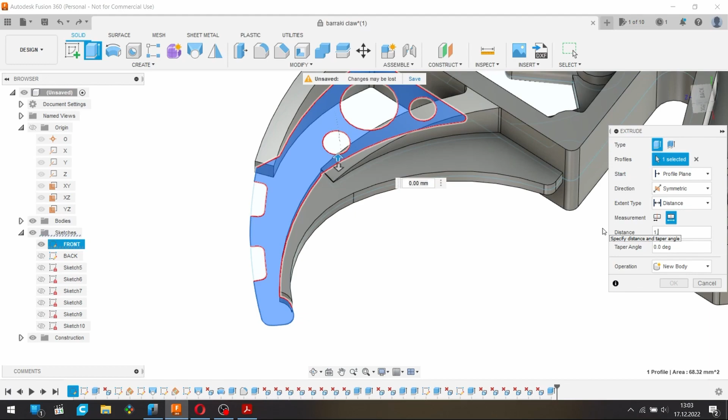I know you don't have anything to cut, I don't want you to cut. It's okay, calm down. Okay, now let's extrude those two. The dimension here is really tiny, let's get this right. 1.1, 1.1, oh join, he finally figured it out. Okay. Those are holes, so it's okay. Let's tackle this feature in a minute.

Everything here works great, it's okay. And now, when we actually have those two faces that those two features have to meet with, we can come in and clean all the weird unwanted geometry. So this goes into it like that. We also don't want this. You can see that this shape would be very awkward to draw correctly when we were sketching from our reference. So this is another instance of the place where you can just redraw general outlines and let the geometry dictate those connections itself.

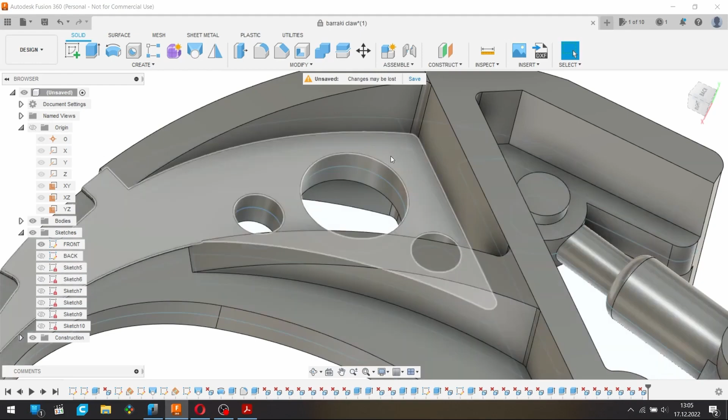Okay, that looks great. And the last thing to do is this feature that is the only reason we have sketch on the other side. Again, there are a million ways to reach the same destination, but I'm going to do it this way, doing both sides one at a time because the feature is not symmetrical.

For this side, we're going to extrude to this plane. Wait, why is it not working? Extrude. Oh, I clicked the start. I wanted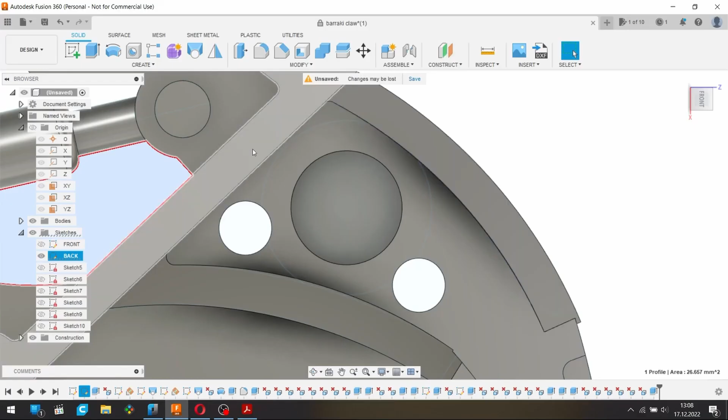As you may know, one point contains infinitely many planes. They can be at any angle as long as they go through this one point. So the actual angle of this plane we need to make doesn't matter in this instance.

First, I'm going to create an axis that goes through this point. I'm going to hide the body for a second. No point for me? No? Okay, let's do this the hard way. Edit point. Okay, now it will work fine.

So again, axis perpendicular to face at point, hide the body. I want this point, and the plane I want this one. No? Wait, again, sometimes I have a little problem with Fusion still. So this plane and this point. Why doesn't it work? Wait, am I choosing the right command? Axis perpendicular to face at point.

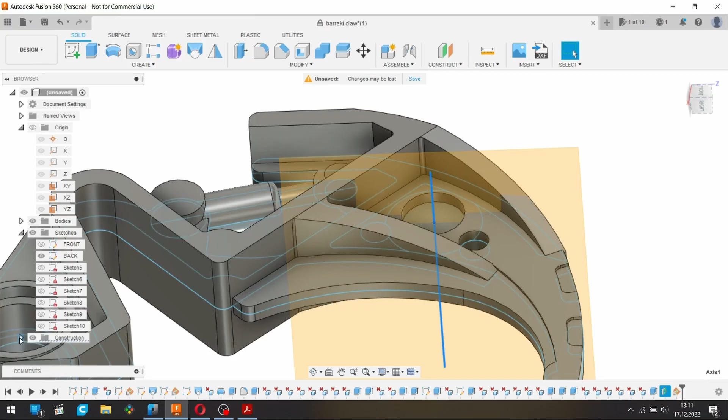I don't need to see this axis anymore, although it might work for the sketch. So let's just create the sketch. Let's hide the body for a moment, and the cross section of the feature I'm going to make is a part of a circle that's cut off by a line.

So this is our profile we want to make, but CAD programs don't like intersecting planes. So if I chose this whole shape and rotated it through this axis, the shape that would go from this plane would go this way, and the shape from this profile would go this way, and they would collide - this one would hit this one. It just doesn't work that way.

So the program wants the shape to be only on one side of the axis, and then it likes it better and everything works the way it should. Now, the axis we want to use in the sketch, so I'm going to project it. Now that we have it projected, I can actually hide it. I know that this line should be an axis.

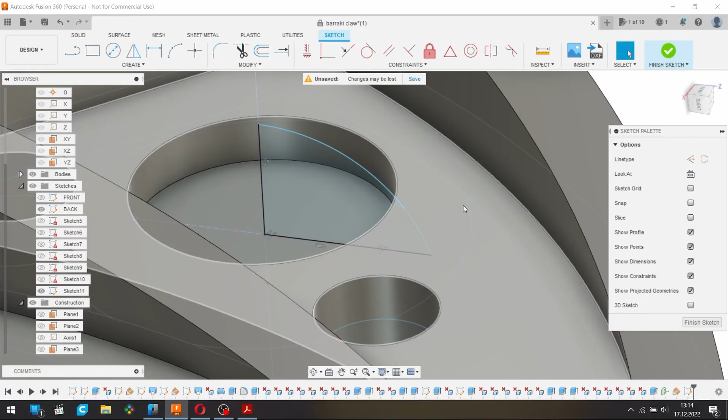No. This point is not supposed to be on the lower plane. It's the point where our new feature, this dome, intersects with this plane. So I have to raise it up. It will all become clear in a second. Let me just fix this.

You will see in a moment why it matters a lot. And we need the height of the plane. This is also the thing I mentioned, that you can have a general idea how you are going to model something, but you just have to figure it out as you go along, and there might be moments when you need to stop and think how to do the thing you want to do, because the way you want it won't actually work, is basically false, and you are making a mistake.

Come on. Okay. Body. There we go. And we are going to find the height of this point again by referencing this plane, and the distance from this plane to this point. I'm going to take off the model, and I'm measuring 2.73. So let's put 2.75.

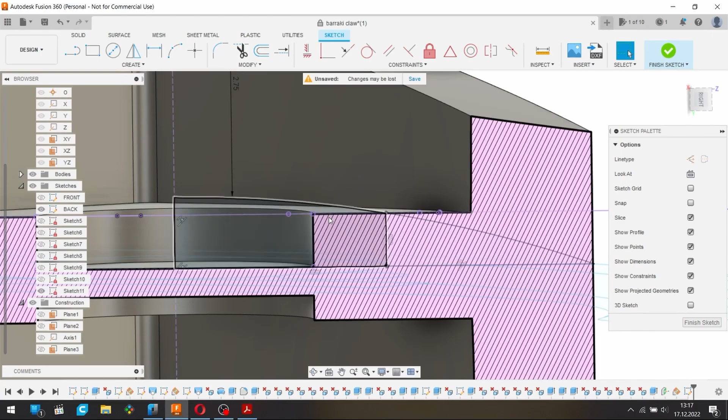And now I'll show you. Wait a minute. Okay. Now it's clear why. Let me just show it this way, why it was important to move this point from this plane to this plane. You can see that if I would use this point as the end of the arc, it would basically meet this point at the same place, but it would have a really different curvature, a really different radius, and it would not be accurate to our reference.

What I caught at the last moment was that while the sketch, our reference sketch, is at the middle of the part, we are looking at the part from the top, so the circle, which is actually a line where this plane and our feature, our dome, intersects, is not at this plane, at this height, but at this plane, at this height. So I had to use this point from our sketch that it's this far from our axis, but it's actually on this plane, and the arc to be correct would have to go through this point and not this point. That's the realization I had, and the mistake I caught in time and didn't make.

So now we have our dome sketched the way we need. We can finish the sketch. We can hide the reference sketch so it doesn't bother us. And now the most satisfying thing to do after setting up a sketch correctly is to do the feature and see how it works out.

Oh, come on. There we go. Rotate around this axis. Again, it wants to cut. We don't want it to cut. There we go. Let's click OK. And now you can see that the dome intersects with the right plane at exactly the diameter we wanted.

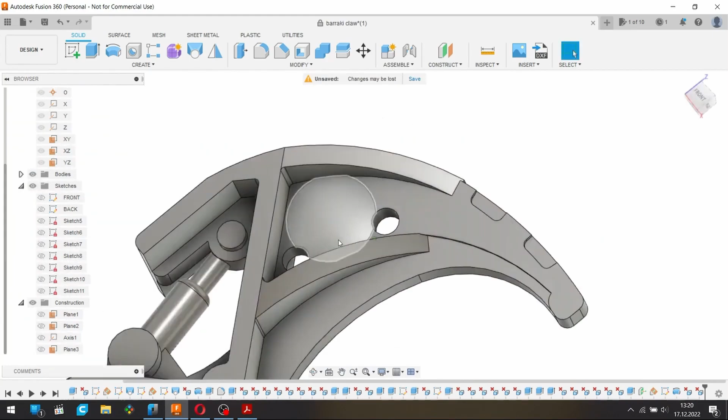Let's just do a general check. Oh, we forgot about the axles. So we are not quite done yet. Everything looks fine.

Now that I look at it, this arc that creates this face actually looks like it's tangent with this line. I don't remember if we did it that way. They are tangent. It doesn't really matter since they are separated by the wall, so you can't really see or check or really find out that they are not tangent without doing some sketching. But if we didn't sketch them as tangent, then it looks like a mistake. They probably should be.

Okay, everything looks great. So we can call it done, except for the axles. Let's do that real quick.

Let me open my cheat sheet. Okay.

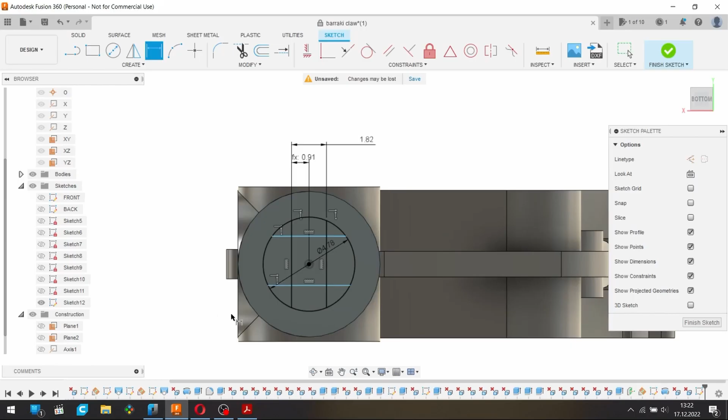This dimension will be this divided by 2. This dimension is the same as this one. This dimension is the same as this one. Times 5. We're going to do the same thing here.

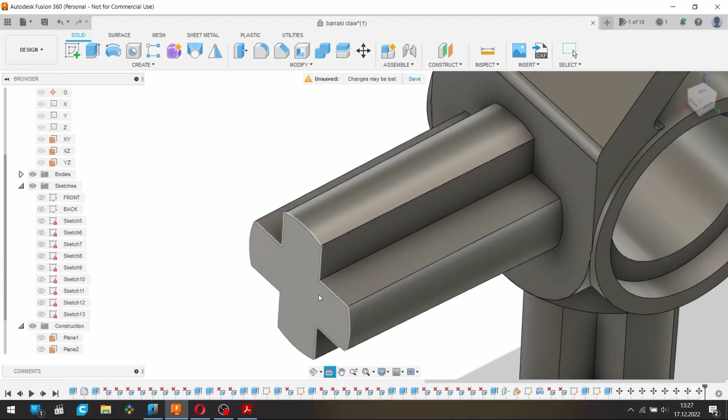And the one last thing to do is to add fillets to the axles, those inside corners. Should be 0.5. Those outside corners should be 0.8.

Let's check. Everything looks great. So let's save our progress.

And now if I show the sketch, you can see that the body perfectly aligns with the sketch, and that's because we worked directly from the sketch. That's the benefit of preparing the sketch beforehand, working with the reference. I didn't look at the reference picture once during this modeling process. I looked at the physical part, I measured some dimensions that were impossible to take from the sketch, like the height of every feature, but other than that, the modeling was a pretty painless process because of the way it was done.

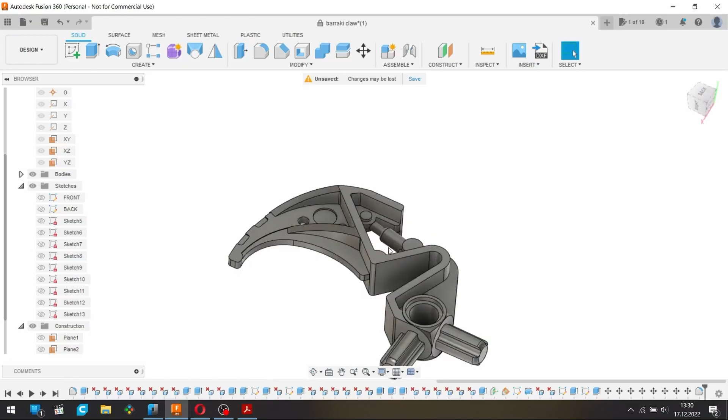And with that, this part is complete. It's ready now to be imported to Studio for digital building mocks. It's ready to be imported to CAM programs like Cura, to slicers, to generate G-code for 3D printers. It's ready to be used as part of digital kit bashing. It can be cut up, it can be used to make other parts. It's a really great thing to have a part in this file format, the editable 3D model.

For example, if I 3D print it and find that the pinhole is too small or the axles are too big or whatever, I can just go in and directly edit, offset face. I can make it smaller, I can make it larger. If I want to print this part without this axle, I can very easily...

You could choose faces like that with your mouse in Inventor. I don't know why the program chooses the whole body. Let's try it this way, maybe.

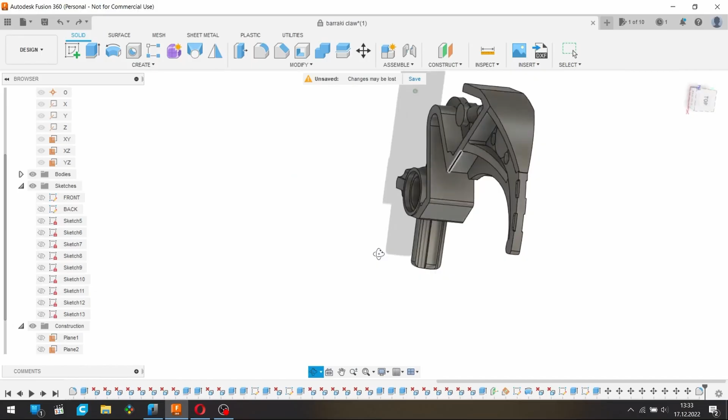With that, I think I'm going to be ending the stream. I'm really happy that we managed to make this part from start to finish, to do everything in one go. The part I chose might not have been the most difficult or exciting one to see being modeled, but I wasn't sure if I chose a more complicated part whether we would manage to do it all in one go.